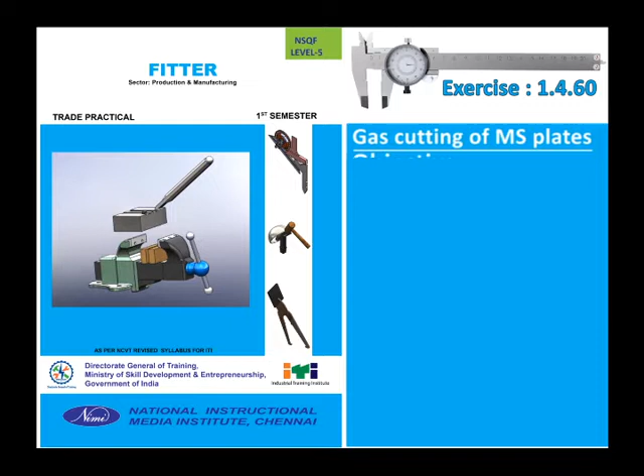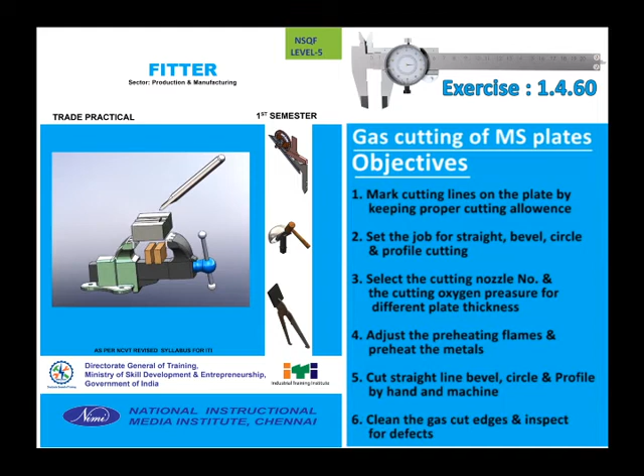Objectives: mark cutting lines on the plate by keeping proper cutting allowance. Set the job for straight, bevel, circle and profile cutting. Select the cutting nozzle number and the cutting oxygen pressure for different plate thickness. Adjust the preheating flames and preheat the metals. Cut straight line, bevel, circle and profile by hand and machine. Clean the gas cut edges and inspect for defects.

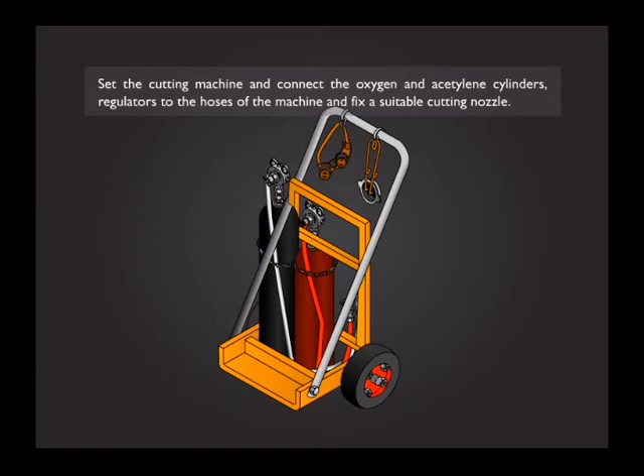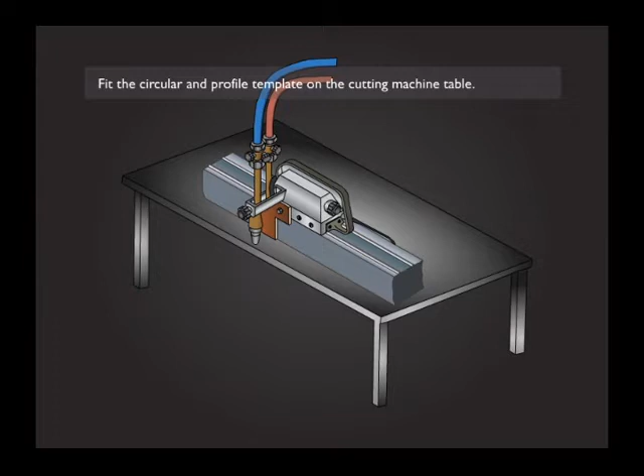Job sequence: Set the cutting machine and connect the oxygen and acetylene cylinders, regulators to the hoses of the machine, and fix a suitable cutting nozzle. Fit the circular and profile template on the cutting machine table. Clean the surface of the metal plate to be cut.

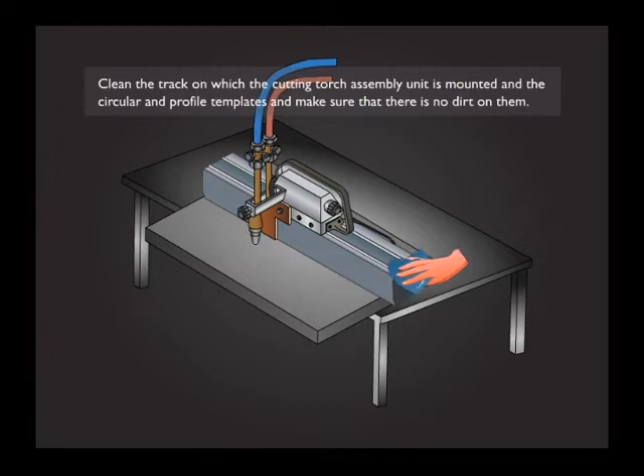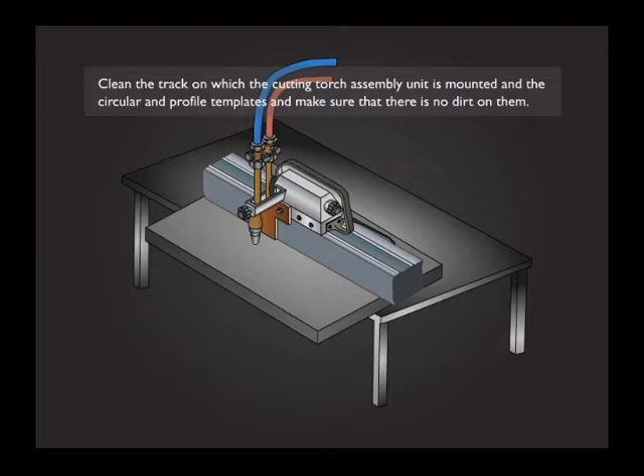Select and fix the nozzle as per the thickness of the plate to be cut. Clean the track on which the cutting torch assembly unit is mounted and the circular and profile templates, and make sure there is no dirt on them. Check the starting lever and ensure that it is in neutral position. Set the required pressure of oxygen and acetylene according to the size of the nozzle.

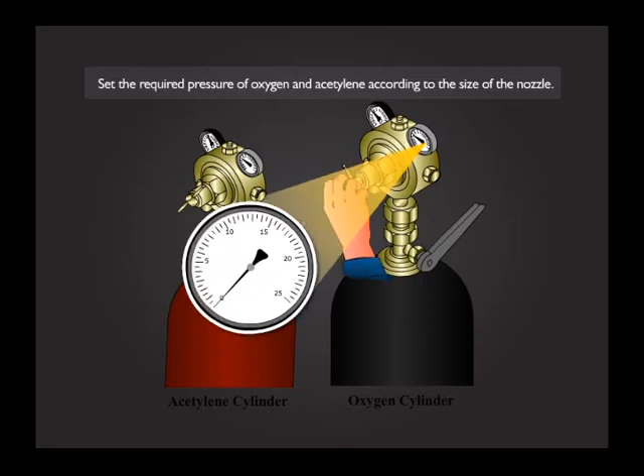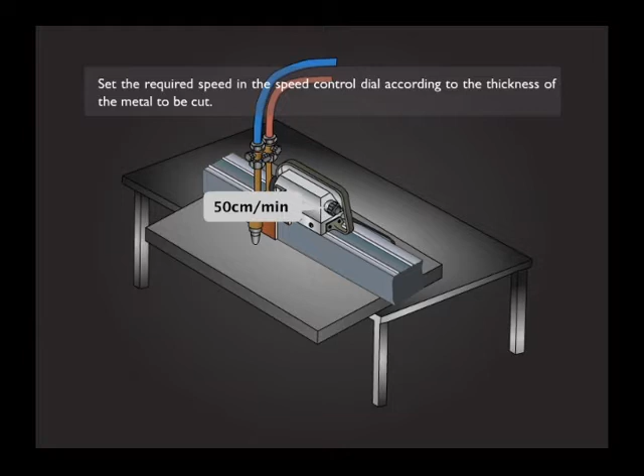Set the required speed in the speed control dial according to the thickness of the metal to be cut. Adjust the nozzle to a height such that the inner cone of the preheating flame is 3 mm from the surface of the metal to be cut.

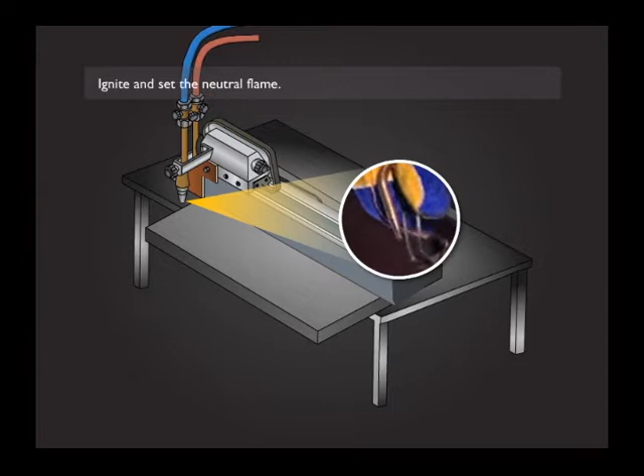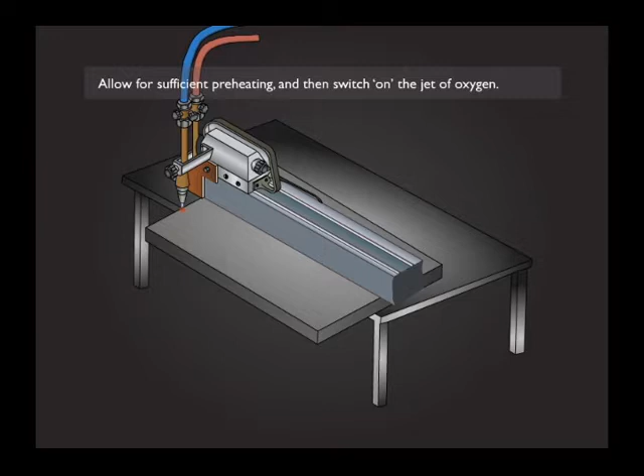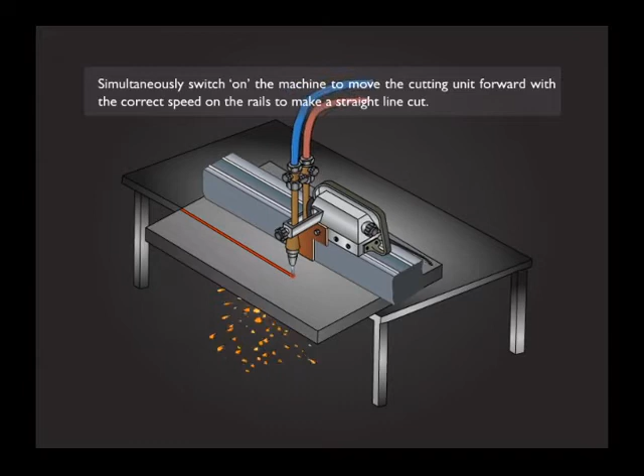Place the cutting machine at the starting point. Ignite and set the neutral flame. Allow for sufficient preheating and then switch on the jet of oxygen. Simultaneously, switch on the machine to move the cutting unit forward with the correct speed on the rails to make a straight line cut. Stop the machine and turn the switch to neutral position at the end of the cut.

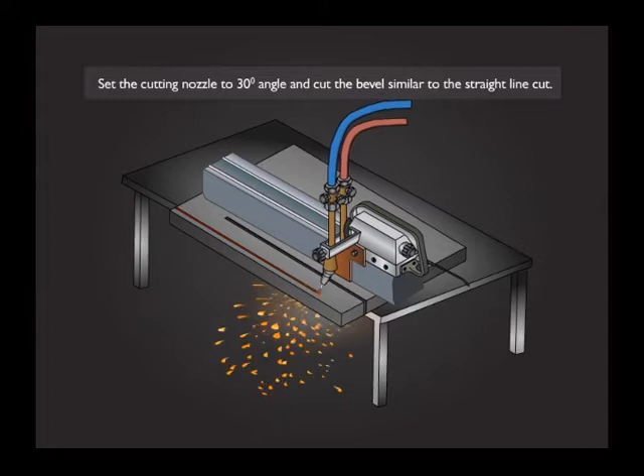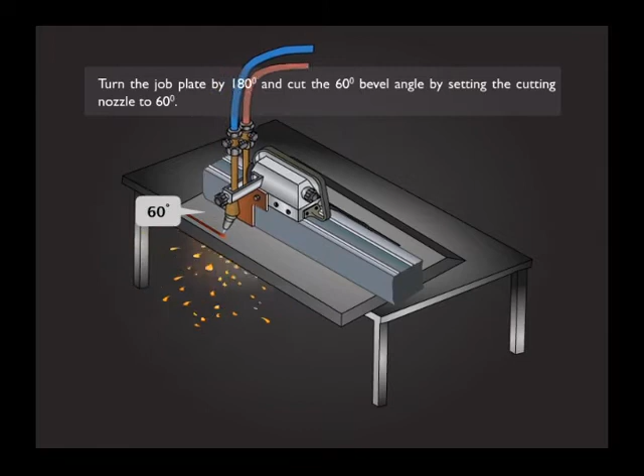Set the cutting nozzle to a 30-degree angle and cut the bevel similar to the straight line cut. Turn the job plate by 180 degrees and cut the 60-degree bevel angle by setting the cutting nozzle to 60 degrees.

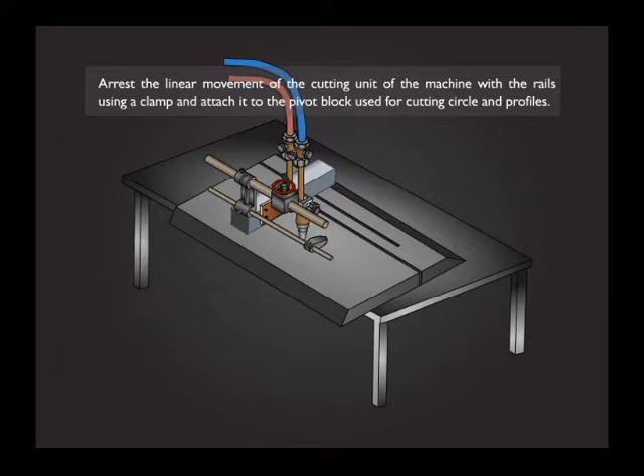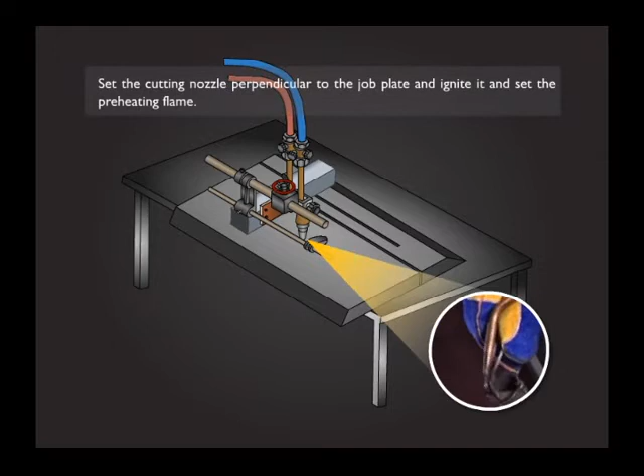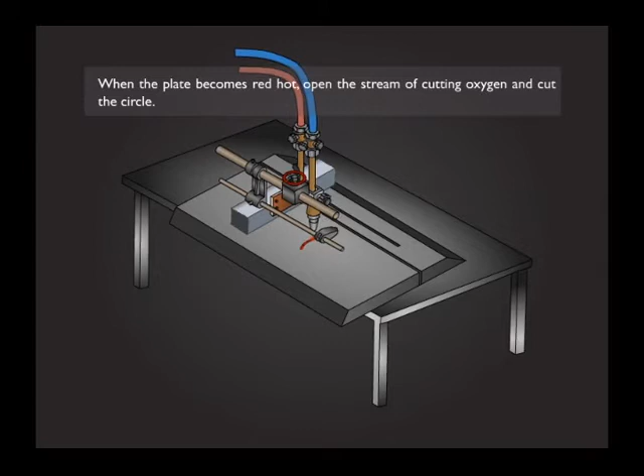Arrest the linear movement of the cutting unit of the machine with the rails using a clamp and attach it to the pivot block used for cutting circles and profiles. Set the pivot block to get the required diameter and fix it on the machine table. Set the cutting nozzle perpendicular to the job plate, ignite it and set the preheating flame. When the plate becomes red hot, open the stream of cutting oxygen and cut the circle.

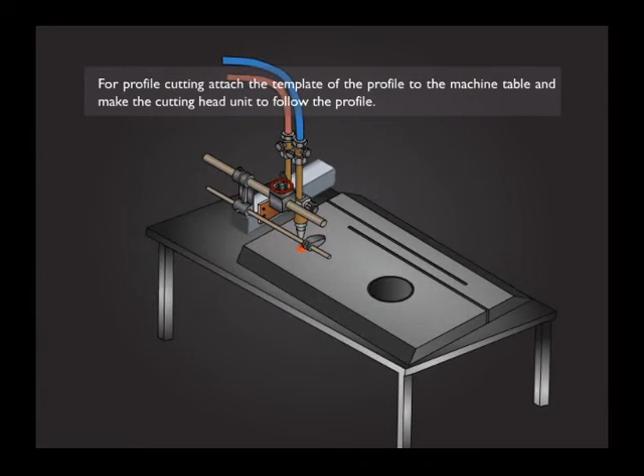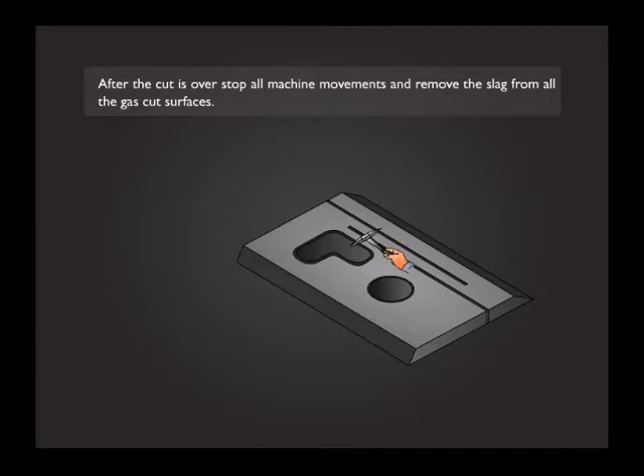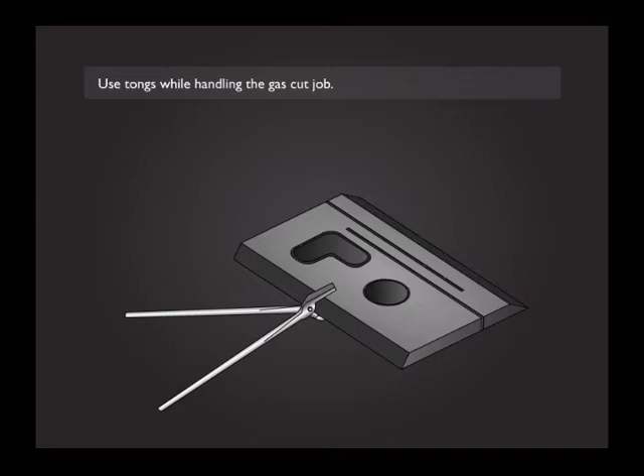For profile cutting, attach the template of the profile to the machine table and make the cutting head unit follow the profile. After the cut is over, stop all machine movements and remove the slag from all the gas cut surfaces. Use tongs while handling the gas cut job. Ensure that the molten slag, and solidified hot slag chipped after cutting, fall into a collecting trough kept below the table. Clean the cutting edges from slag and inspect the cut for gas cutting defects.

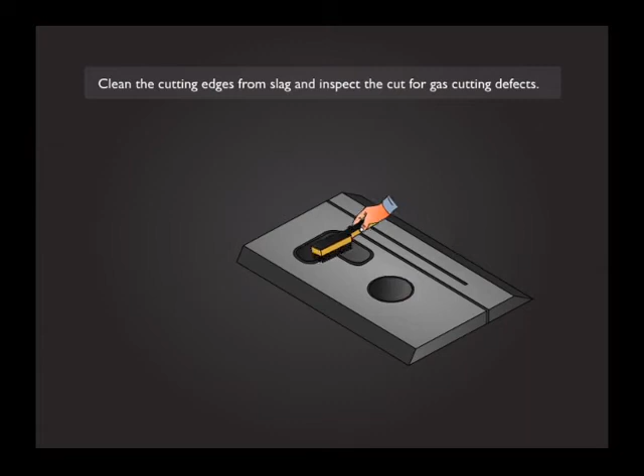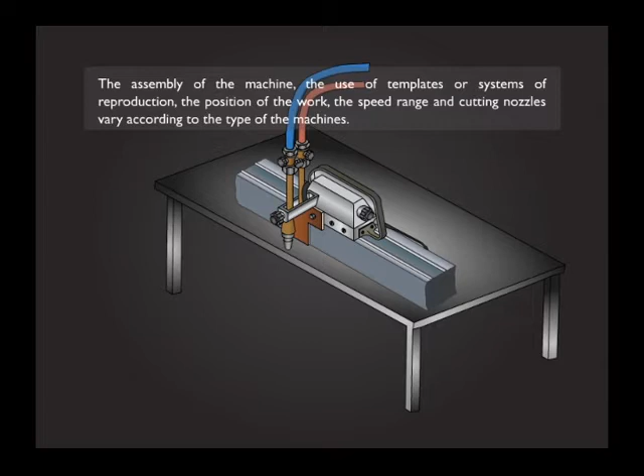Skill sequence: The assembly of the machine, the use of templates or systems of reproduction, the position of the work, the speed range and cutting nozzles vary according to the type of machine. Assemble the accessories like cutting head for straight and bevel cutting with the cutting machine.

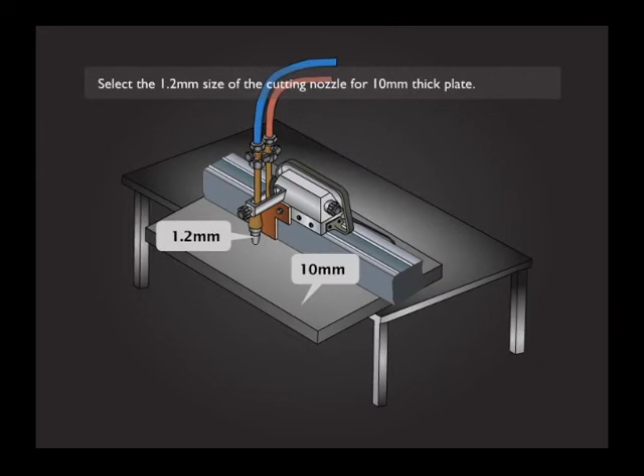Select the 1.2 mm size cutting nozzle for a 10 mm thick plate. Set the correct gas pressure of 0.15 kg per square centimeter for acetylene and 1.4 to 2 kg per square centimeter for oxygen for the 1.2 mm size nozzle.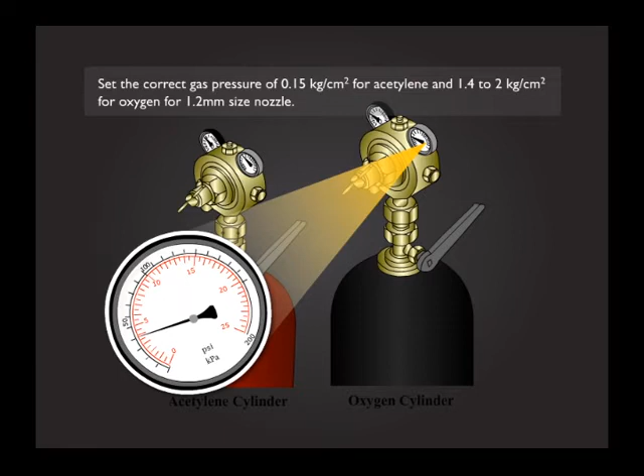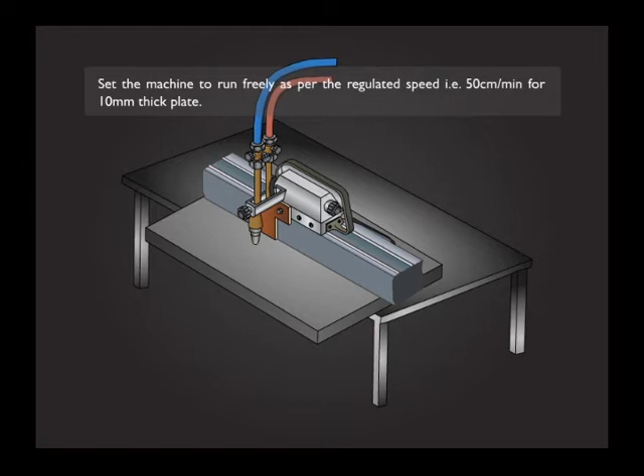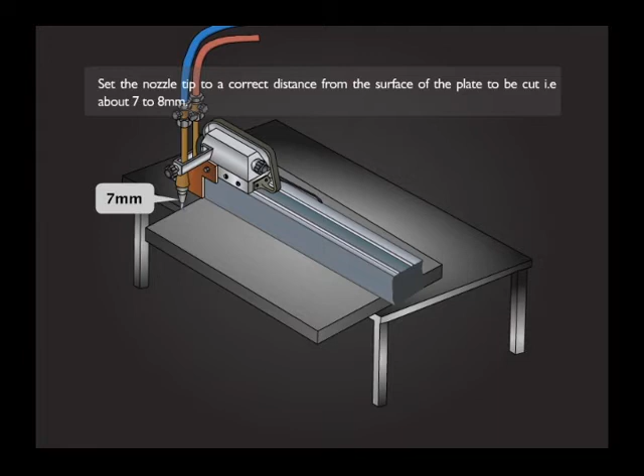Set the machine to run freely as per the regulated speed, that is 50 centimeters per minute for a 10 mm thick plate. Ignite the flame and adjust the neutral flame. Set the nozzle tip to a correct distance from the surface of the plate to be cut, that is about 7 to 8 mm. Start the machine and run it to the required distance to cut the metal.

Switch off the machine and extinguish the flame at the end of the cut. Remove the plate, clean the iron oxide slag, and inspect the cut surface.

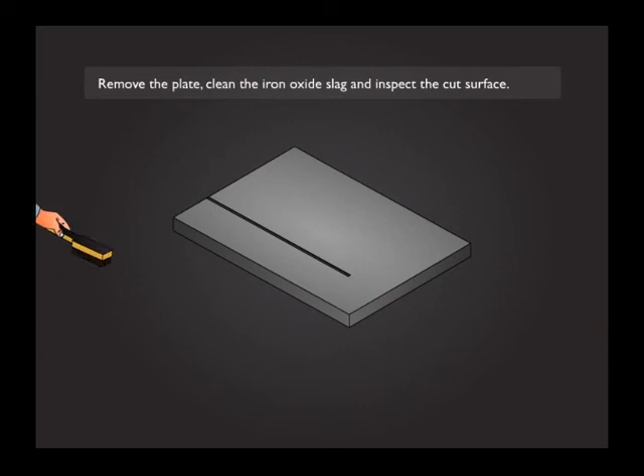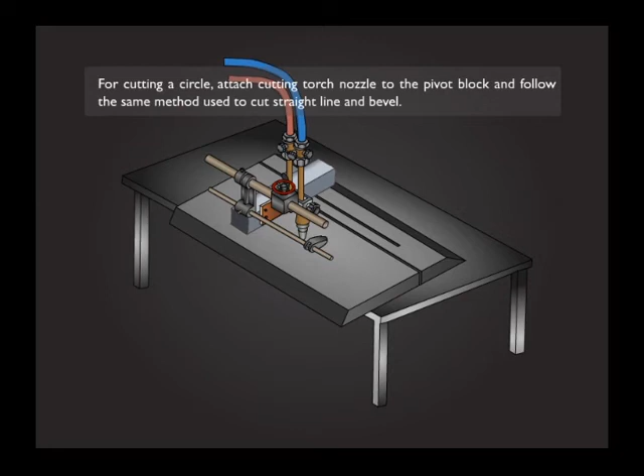For cutting a bevel edge, tilt the cutting torch nozzle to the required angle and follow the same skill sequence followed for straight line cutting. For cutting a circle, attach the cutting torch nozzle to the pivot block and follow the same method used to cut a straight line and bevel.

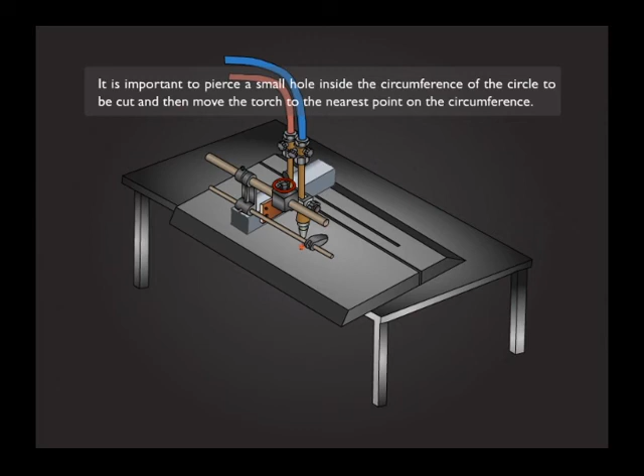It is important to pierce a small hole inside the circumference of the circle to be cut, and then move the torch to the nearest point on the circumference. Then use the pivot block to move the flame along the circumference of the circle.

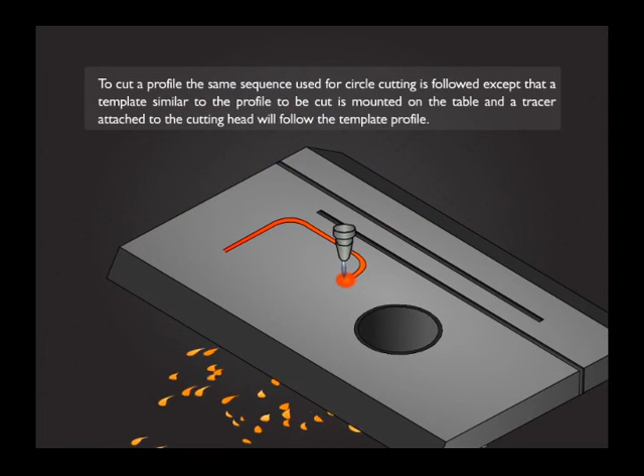To cut a profile, the same sequence used for circle cutting is followed, except that a template similar to the profile to be cut is mounted on the table, and a tracer attached to the cutting head will follow the template profile. The torch flame will cut the profile on the job.